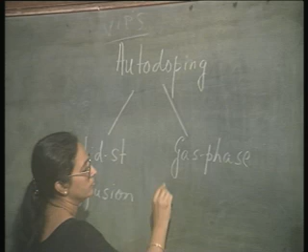Now, there are two reasons for this inadvertent doping or auto-doping. These two reasons are, one is due to solid state diffusion, and the other is due to gas phase auto-doping. What are these two things basically? See,

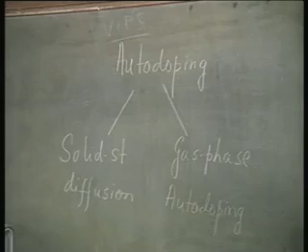before the epitaxial growth takes place, the sample is being treated to high temperature. At that high temperature, it is possible for the dopants already present in the substrate to out diffuse, and this will change the composition of the gas stream. The gas stream composition is controlled depending on the level of doping in the epitaxial layer that you want to grow. You want to put that amount of boron or phosphorus or arsenic along with silicon, but the already present dopants in the substrate layer will out diffuse and modulate the composition of the gas stream,

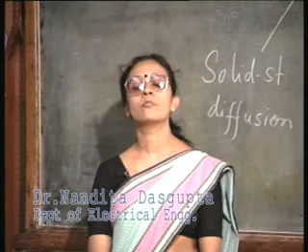so that when the epitaxial layer is being grown, these dopants which were originally present in the substrate can get reintroduced in the epitaxial layer. Thereby, the doping concentration of the epitaxial layer will change. It will not follow exactly the required doping level. For example, if my substrate is doped p type, and if I want to grow an n type epitaxial layer, near the interface I may have a problem of having first a slightly p type epitaxial layer growing and only then the n type layer growth. We will explore these possibilities later.

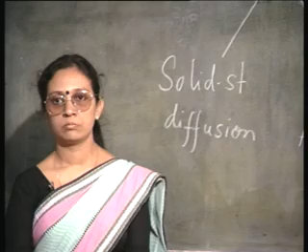The other thing is of course solid state diffusion. That is, as the epitaxial layer is being grown, if the doping concentration of the substrate and the epitaxial layer are widely different, which in most cases is likely, then there will be a diffusion from the higher concentration side to the lower concentration side, and that will also modulate the deliberate doping concentration of your epitaxial layer.

So, both these effects will cause a change in the doping concentration of the epitaxial layer, and therefore, it will put a limit to how thin a layer you can grow with proper control of doping, because there is going to be a transition layer between the bulk and the epitaxial layer, which will be determined by these effects of autodoping.

If we look at the first card we have here today, the dotted line signifies the ideal abrupt junction between the epitaxial and the bulk region. Ne is the epitaxial layer doping concentration, Ns is the substrate doping concentration. Let us assume that they are both same type, only the doping concentrations are different. In this particular case, I have assumed that the substrate is doped highly and the epitaxial layer is doped to a very low extent, it is almost intrinsic.

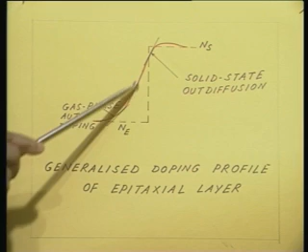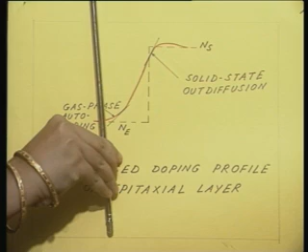Now, in this particular example, I have chosen the epitaxial layer and the substrate to be of the same type. Let us say the epitaxial layer is N type, the substrate region is N plus. So, what I have is just this extended transition region, and that actually determines how thin an epitaxial layer I can grow with the proper Ne doping concentration. You see, from this figure it is obvious that up to this is my transition layer, and only after that I have the epitaxial region with the proper doping concentration.

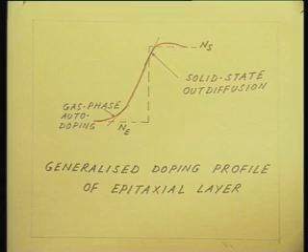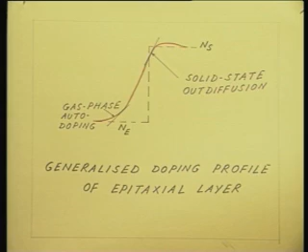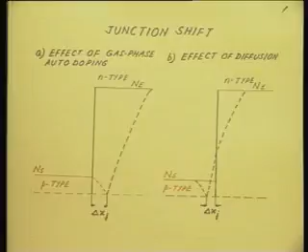The situation can be even more serious if the two regions are of opposite dopant type. That is to say, if I have a substrate and an epitaxial layer, one is P type and the other is N type. In that case, what is going to happen is called a junction shift. That is, the metallurgical junction and the electrical junction will not be at the same position. By metallurgical junction, what do I mean?

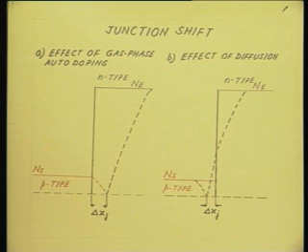Suppose my substrate NS is p type, and my epitaxial region Ne is n type, then the metallurgical junction is present here, this black line, that is my junction point. It should be the metallurgical junction exactly at the transition point. But because of the effects of auto-doping, the junction can get shifted either way. The figures I have here are not actual figures, they are the results of computer simulation. And in these two figures, we have tried to separate out the reasons of auto-doping.

The first figure, if you look at that, is the effect of gas phase auto-doping. Let us look at what is happening. I have the substrate with a doping concentration Ns. It is a p-type substrate. Gas phase auto-doping is the effect where, before the epitaxial layer growth, when the substrate is being heat treated, some of this p-type dopant will escape, it will evaporate and it will modulate the gas stream. So, some of the p-type dopant is escaping and getting reintroduced into the epitaxial region. This red dotted line shows that the p-type dopant is reintroduced in the epitaxial region.

And that is why, even though I wanted to grow an n-type epitaxial region, near the junction I find that the junction has actually got shifted into the epitaxial region. The p-type region has actually extended inside the epitaxial region in figure A. Do you notice that the p-type region, this red region, has extended into the epitaxial region, and therefore, the junction is now here. The delta xj denotes the amount of the shift. So, this is the effect of gas phase auto-doping.

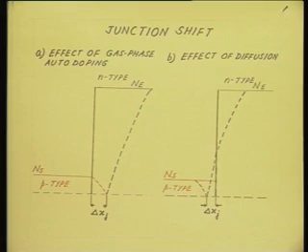These are, as I said, the results of computer simulation, in which we have tried to isolate one effect and study only that, either gas phase auto-doping or solid state diffusion. In a practical situation, both these effects will be present. So, which way the junction shifts will depend upon their relative dominance. But that is a very important problem: the electronic junction may be shifted from the metallurgical junction.

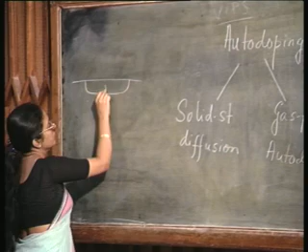So, these are the effects of autodoping. In this particular case, of course, we have considered only vertical autodoping, that is, the region immediately above the substrate is getting doped. For example, if I have an N plus region and I grow an epitaxial region, then this is the portion where the effect of autodoping is going to be felt. The shaded region is the region where the effect of autodoping is going to be felt.

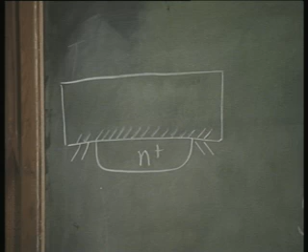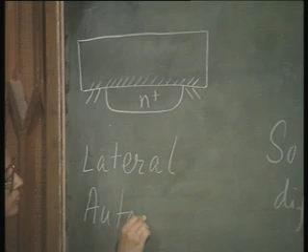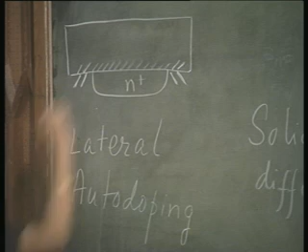This is vertical autodoping. But actually the effect will also be felt in a region adjacent to the substrate. In fact, all over here the doping concentration will get modulated. This is called lateral autodoping. Lateral autodoping is almost exclusively due to gas phase autodoping. The solid state out-diffusion plays very little role here. It is almost exclusively the effect of gas phase autodoping.

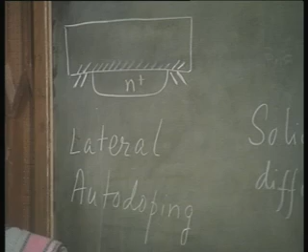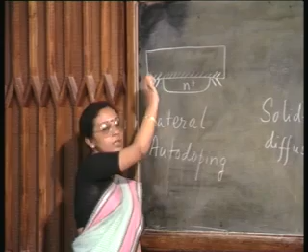Before the epitaxial layer is grown, when the substrate was being subjected to heat treatment, the dopants have diffused out and they can be reintroduced all over this place, and from there can get reintroduced into the epitaxial region. So, these are the effects of autodoping, and lateral autodoping is something one should be very careful about, because it may cause an electrical short between two adjacent devices.

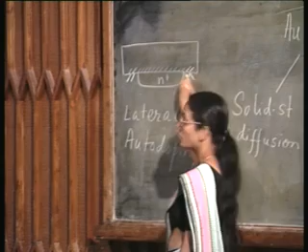See, this is an N plus region, the next N plus region may be further off here, but because of the lateral autodoping all the N plus regions can get connected. So, unless you take proper precaution to isolate between the two N plus regions with a boron diffusion or something like that, there is a possibility of getting an electrical short due to lateral autodoping.

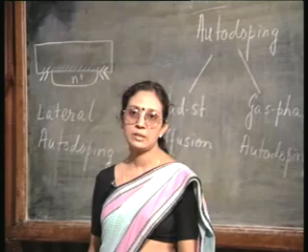Now, there is another interesting aspect associated with epitaxy. You see, normally I would assume that when there is an indentation on the surface, that is a step on the surface, and if I am growing an epitaxial layer, that same step will be transferred into the epitaxial region also. That is, what I expect is something like this.

See, what I have drawn here is simply the process steps involved in the bipolar junction transistor fabrication. I started out with the p-type substrate, then I have made the N plus buried layer, then I have stripped the oxide, and in doing so I have created a step here. The step is visible to all of you, you can see the step, right.

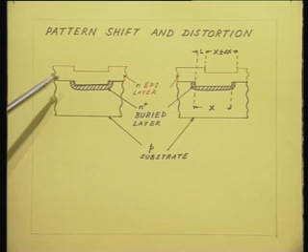So, now if I grow an epitaxial layer, I would expect it to be aligned with this step, so that the epitaxial layer should also be formed like this, because everywhere I expect that I am growing, say, 5 micron from the substrate. So, this height should be 5 micron. I should expect it to be properly aligned.

Now, this proper alignment is going to play a very important role in my further processing, because once the epitaxial layer is formed, I have no way of knowing where the underlying buried layer is. So, this step is only going to tell me where the underlying buried layer is, so that I can properly put my base mask and the emitter mask, so that the transistor is fabricated in this active region and not this way or that way.

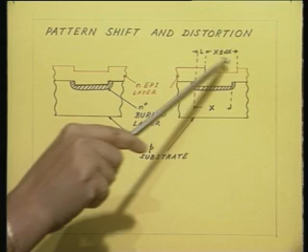So, this is what I want, but unfortunately what in most cases I am going to get is this figure. Here you see that the step is not aligned, it has got shifted. Also, the size of the buried layer mask may not be the same. Like here I have shown that the length of the buried layer diffusion was x, and the length of this step may be x plus or minus delta x.

The pattern on the substrate may get shifted by an amount L, and it can also get distorted by an amount plus minus delta x. This is called pattern shift and pattern distortion.

Now, the question is, why should this happen? Why should this pattern shift and distortion take place? It takes place because, as you already know, the crystal growth is extremely dependent on the crystal orientation. What is epitaxy after all? It is growth of a crystalline layer.

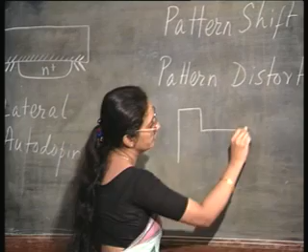So, whenever there is a step on the surface, you are exposing a number of crystal planes at this step. See, the surface may be 100 or 111 or whatever, but whenever there is a step, a number of crystal planes are going to be exposed. And when epitaxial growth is taking place, it is taking place anisotropically, that is, the growth rate is going to be dependent on the crystal orientation.

That is why you do not have uniform growth rate. If you had uniform growth rate, this step will get translated into the epitaxial layer, no problem. But because this growth rate is not isotropic, it is anisotropic, you get all these problems of pattern shifting and pattern distortion. How does one minimize this pattern shift? See, minimizing this pattern shift and distortion is going to be quite a crucial point, because this will determine the alignment of my further processing steps.

So, a lot of research has gone in to connect the pattern shift and distortion with the epitaxial growth parameters. And these are some of the findings. Pattern shift is minimized at high deposition temperature. Why should it be so? Remember, high deposition temperature means the surface mobility is high. Whenever the surface mobility is high, the growth tends to be isotropic, that is, on all the faces the incoming molecules have enough time to orient themselves. Therefore, on all the crystal planes the growth rate tends to be same. So, if you have high deposition temperature, pattern shift will be minimized.

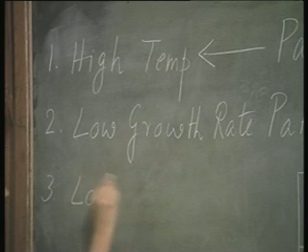And it is also seen that the more the amount of chlorine you have, the more is the pattern shift. Again it can be related. The more chlorine you have, the growth rate tends to be high, therefore anisotropy tends to be more; therefore reduce the amount of chlorine and you are going to have lesser problem of pattern shift. A corollary of this third point is that with lower pressure, the pattern shift will be less. If you have lower pressure, you can vent out the chlorine or the HCl faster. Therefore, the pattern shift will be less.

In addition to this, how the substrate is oriented during epitaxial growth also seems to play a major role. It is found that if you have a 100 substrate, keep the substrate perfectly oriented to its crystal plane, that is, the gas flow should come perfectly along the sample surface. On the other hand, if you have a 111 wafer, then misorient it slightly, by 2 degrees or 4 degrees. That has been seen to minimize the pattern shift problem.

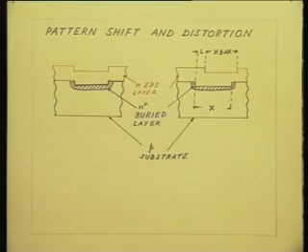Now that we have grown an epitaxial layer, next point is, how good is its crystal quality? Let me tell you something. The epitaxial layer is only as good as the bulk crystal is, because you are growing something on top of an already existing layer, and as I said, the term epitaxy itself means arranged upon. The crystalline quality of the epitaxial layer comes about because of the underlying crystalline symmetry of the bulk layer. So, unless the bulk layer shows a very good crystalline symmetry, you cannot expect anything to be arranged upon that.

So, the quality of an epitaxial layer is critically dependent on the quality of the bulk layer. It is only as good as the bulk layer, and very often the quality is really inferior to the bulk crystal. That is because the bulk crystal defects will get translated into the epitaxial layer. During the epitaxy, some additional defects will come into the picture. Therefore, the final crystal quality is likely to be inferior to the bulk crystal quality.

Now, here I have a schematic representation of some of the defects in the epitaxial region. First of all, let us look at this line. By this line, I want to represent an edge dislocation. You know, an edge dislocation is an extra half plane of atoms which can be viewed in 2 dimensions as an extra line. So, if this edge dislocation is present in the bulk crystal, as the epitaxial layer grows, this dislocation will simply carry on into the epitaxial region also. It will extend all the way into the epitaxial region.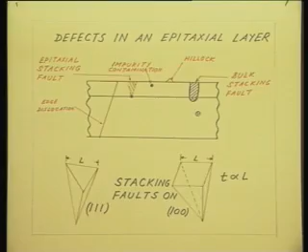In both cases this is true. Okay. Here the side of the triangle I am calling L, here I am calling the side of the square or the rectangle L. This will give you a good idea of what the epitaxial layer thickness is going to be without having to resort to other techniques, a simple ready-to-use way.

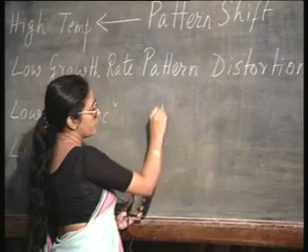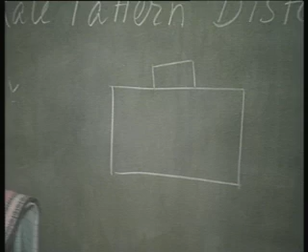So far we have been talking about vapor phase epitaxy in general and vapor phase epitaxy of silicon in particular. I could continue on this topic for some more time, like there is the possibility of having selective epitaxy. Selective epitaxy is something like this. Suppose you have a substrate, you want to grow an epitaxial layer, but you do not want to grow it all over the place, you only want to grow it somewhere here. So, this is called selective epitaxy.

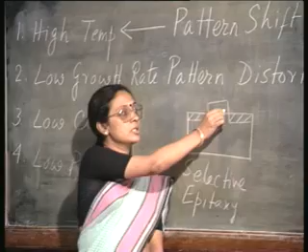This is usually done by covering the regions where you do not want epitaxy to take place with silicon dioxide or sometimes polycrystalline silicon, and then carrying out the epitaxial process, controlling the temperature and the growth rate, so that the epitaxial growth is only taking place on the exposed silicon. See, it is quite simple to understand.

Suppose you have the surface covered with oxide, only there are some windows in which the underlying silicon is present. You remember, the chlorosilane reaction is actually surface catalyzed. So, only where it is coming in contact with the silicon surface will epitaxial growth take place. Similarly, if you are covering it with polycrystalline silicon, then also it is quite simple to achieve, because on polycrystalline the growth will not be epitaxial, but it will tend to be amorphous or polycrystalline.

Okay. So, selective epitaxy is quite an attractive technique, because you can have islands of silicon epitaxial region. So, the isolation between the devices is going to be quite simple. You have one transistor here, another transistor here, like that. They can be made automatically isolated. Okay. But in principle, they are all the same. They all come under the category of vapor phase epitaxy. Right.